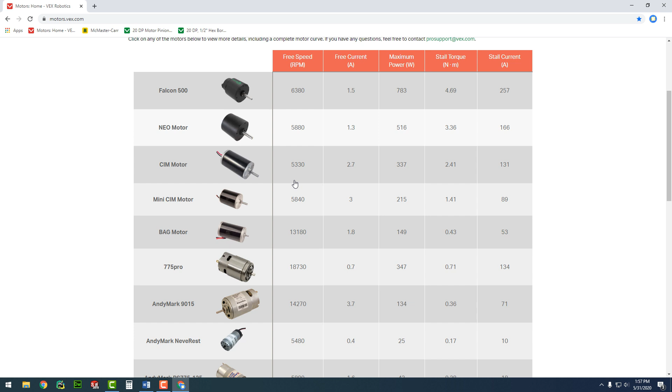The place to start would be to go to motors.vex.com. They have a really nice chart for all legal FRC motors. The motors down here are generally for mechanisms, and up here are the bigger motors, more power for drivetrains. So the Falcon's a great motor, but they're out of stock. We can't get our hands on those, so we can't really use that. We do have a lot of CIM motors in stock. They're pretty cheap, and they're ubiquitous. So let's talk about using a CIM motor for a drivetrain.

Now some of you might say, well, why don't we just stick a wheel on the end of the motor and hook it up? And I'll explain why that's not going to work. So what this is saying, the free RPM speed, means this motor spins at 5,300 RPM if there's nothing attached. So we're going to lose a little bit, maybe 10%, if you load it down with something, which we'll be doing because we'll be putting a robot on it. So let's multiply that out. And so our real RPM is going to be around 4,800. And if we divide that by 60, RPM is revolutions per minute, so that's about

80 revolutions a second. So if we were to put a 6-inch wheel, let's find the circumference by multiplying times pi. That's an 18.8-inch revolution. So every time a 6-inch wheel goes around, it moves about 18.8 inches. And if we talk about doing 80 revolutions a second, then that's 1,500 inches per second that wheel will move. And if we divide that out by 12, then that's saying that our motor and our wheel attached directly to it will move about 125 feet per second. Some of you might say, that's awesome, that's super fast, that's exactly what we want.

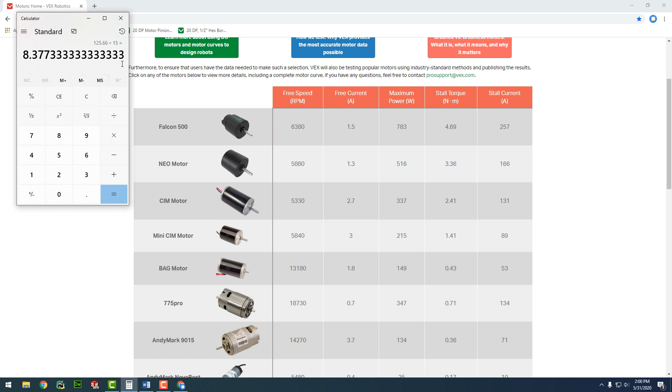And you might say, well, I have no idea what a good ratio would be or what a good speed would be. Generally for FRC, anywhere from 10 to 18 feet per second is good. So let's say we wanted to go 15 feet per second. That means our gear ratio will be right around 8.3. And you're never going to get exactly 8.3773. That's not realistic. There's no set of gears that you're going to find that'll do that. So let's figure out where we can find a gear ratio where for every one output rotation, the motor will spin 8.3 times. So you need a little gear on the motor and a big gear on your output shaft. So let's figure out where we can do that.

Okay, so let's see if we can find ourselves some gears. So if you go to VexPro again, and we go to gears, let's find a motor pinion first. So here are your motor pinions, 20-degree pressure angle. And you can see they have different pinions for different motors. We need a CIM pinion, and they have different sizes. So what size should you use? Well, the smaller the pinion you use, the smaller the output gear you use. The smaller the output gear, the lighter, and the smaller the gearbox dimensions overall. So we want to pick the smallest one we can that'll work for us. It's also a little bit cheaper, you'll notice, and when you're doing a bunch of gearboxes, that can add up.

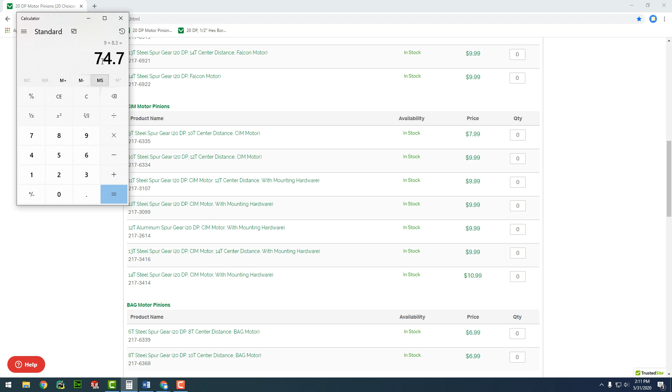So let's pick the 9-tooth spur gear, and then you say, okay, well, if we have 9 teeth and we know our gear ratio is 8.3, what should our output gear be? And so we need a 74.7-tooth output gear. So let's go back up and look at the output gears they sell.

If we scroll down, they do sell a 72 and a 74 gear. Now 72 is a much more common gear that we use in other places, so for that reason I would probably pick a 72. You'll go a little bit faster, but it's nice to use common parts, and if we have some in stock, then we can reuse them.

So we'll be looking at a 72-tooth aluminum gear and a 9-tooth motor pinion. So 72 divided by 9. So this will give us an overall gear ratio of 8, which is a nice round even number, so that works well. Okay, so we've selected our parts.

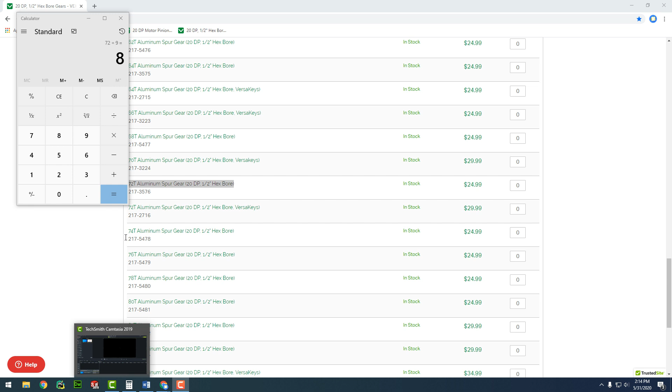Now, the great thing about VexPro is that they provide their CAD files at the bottom of the site. So if you want a 72 tooth gear, all you have to do is find it and hit download. Now these are going to download in a format called STEP, and that's something that we don't typically use in SolidWorks, but we can import it pretty easily.

So let's grab our motor pinion as well. Again, that was a 9-tooth spur gear. So if you scroll to the bottom and you find CAD files, you'll find not Falcon, not 775, not bag, there's the CIM motor. So we're looking for a 9-tooth spur gear. That one right there. Let's grab that.

So let's fire up SolidWorks and import these two gears and save them and apply materials to them. Okay, so let's open.

Okay, and we apply steel to that since it's a steel gear. And then let's open our 72-tooth spur gear here. Now the spur gear is actually 7075 aluminum. It's a different material. And then we'll save that as well. So now we have our two gears and we're ready to build our gearbox, or at least start on our gearbox.

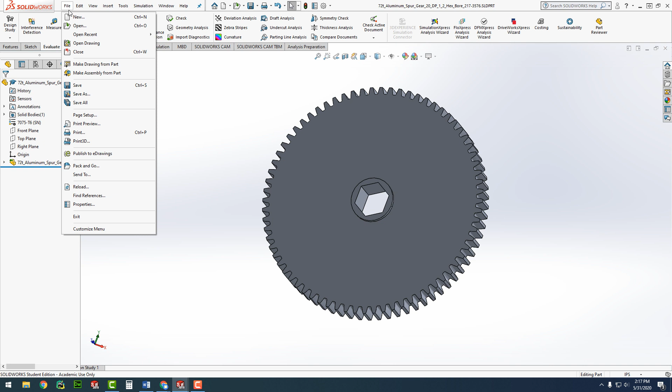Okay, so let's make a new part. And the first part we're going to make is a plate to hold our motor and our bearings. And right now you just kind of need to know the dimensions of what you want to build. So if you go back to your gear, you can see how big your gears are under the drawing.

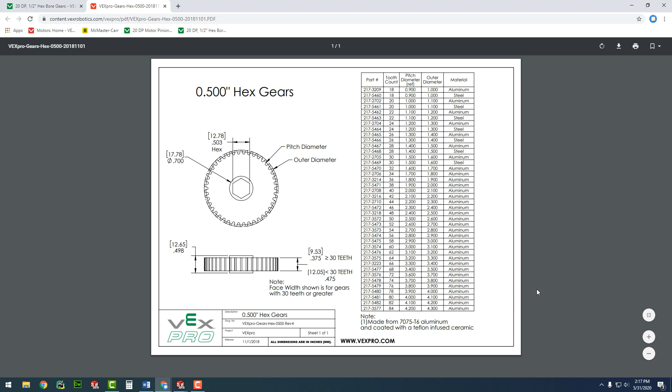So if we look at a 72 tooth gear, the outer diameter will be 3.7 inches. So this will actually have to be 4. Otherwise the gear will stick out the top and the bottom.

And then how thick should you make your plate? Well, we have 1/8 inch, 3/16, and quarter. Quarter is pretty heavy duty, but you can pocket it. You can take a lot out of that. Let's do that. Let's make it a 1/4 inch.

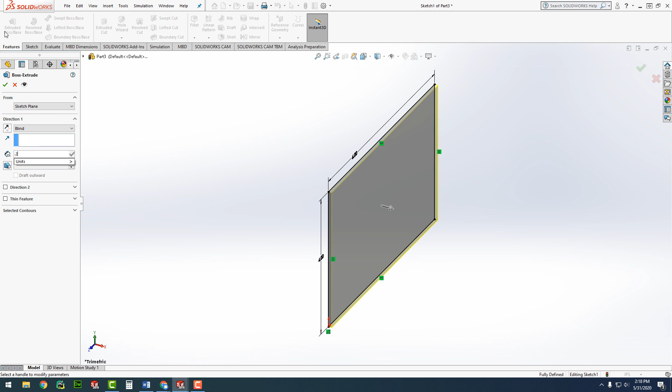And then we'll make that material aluminum as well. So let me add aluminum. May as well make it a favorite too. 6061. Okay, so there's our aluminum plate.

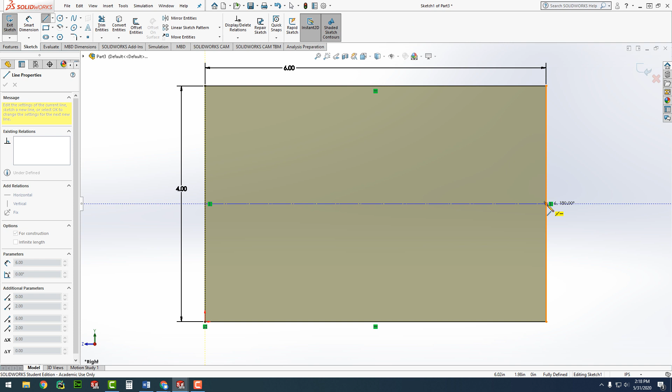Now, what we need is a hole for the motor, and then we need a hole for the output shaft as well. So what I'm going to do is I'm going to draw a center line because we'll put both holes right in the middle. Okay, so here's the hole for the motor.

And then if we go back to VexPro and we look for the CIM motor, it'll give us dimensions on how the motor mounts. So if we look at a CIM motor, down at the bottom there'll be a drawing, and we can see the mounting holes. So the mounting holes are 2 holes. They're on a 2-inch around circle, and they're a 0.159 diameter hole.

And then this hole in the middle is a 3/4 inch. So to give it some room, I'm going to make this 1 inch. That'll make the motor shaft fit through. And then what I'm going to do is draw a circle right here. See how that little line shows up? That means you're vertical with it.

And I'm going to say 0.16. And then this needs to be 1 inch away. It's a 2-inch diameter, so that should be 1 inch away. Now let's move this motor, give it a dimension from there to there, and make it 1.5 inches. Perfect.

Alright, so what we're going to do is we're going to mirror this hole there across there. There we go. And now we should be able to mount the motor to that. So let's save this as the motor mount plate. And then what we're going to do is we're going to do a new assembly, and

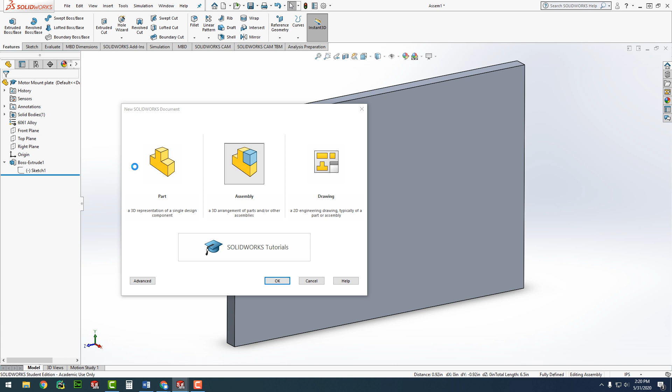we're going to take this brand new motor mount plate and we're going to put it there. So let's just do a quick test fit. So under assembly, let's insert component. Now if you go to our GrabCAD and you go to FRC common parts, you'll see we have a ton of parts that are already downloaded, and it's very likely we have a CIM motor ready to go.

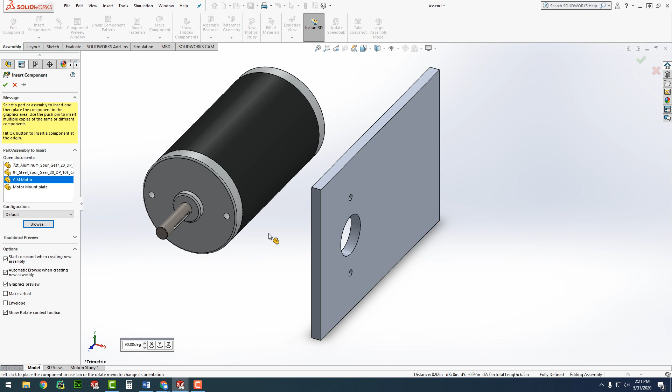There it is. So let's take this face of this motor and mount it to this face here, and then let's take this hole here, mount it to that hole there. Now that those are mated, it's around that circle, but we can still move things around that way. So we need to mate this other hole to there. And now that we've done that,

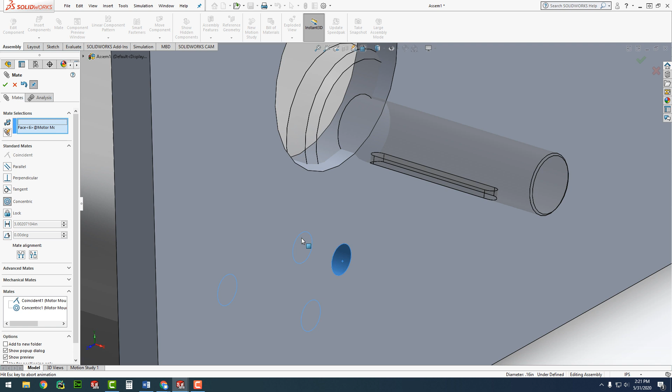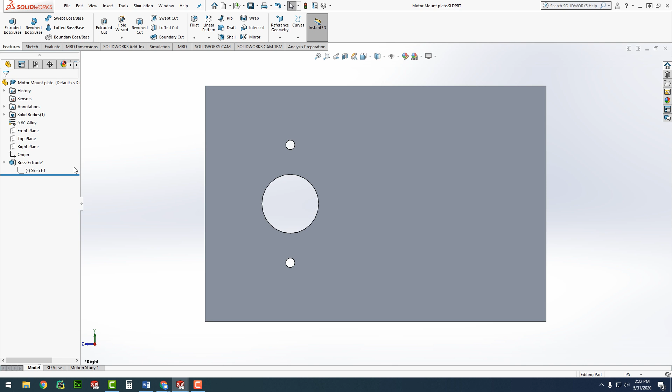we've started our gearbox. Okay, so let's save that real quick. There we go. Okay, so we've got the motor on there. Now we've just got to get our other gears. Okay, so let's open this plate back up. And we know that we need to add another hole somewhere over here for our output shaft.

You say, well, how big should that hole be? Well, whenever you have something spinning like this, you're going to want a bearing. And bearings are generally 1.125, an inch and an eighth. And we'll have to download the bearings. I think we have some in the common parts anyway. So now if we look, we have a second hole, and we can add a bearing there.

The question is, what is the distance between that? And that's going to require a little bit of computation. It's not too hard. But your center to center on your gears is calculated using your data from your provider. So if we go back to VEX and we look at our motor pinion, this pitch diameter you'll see at the bottom under the drawing.

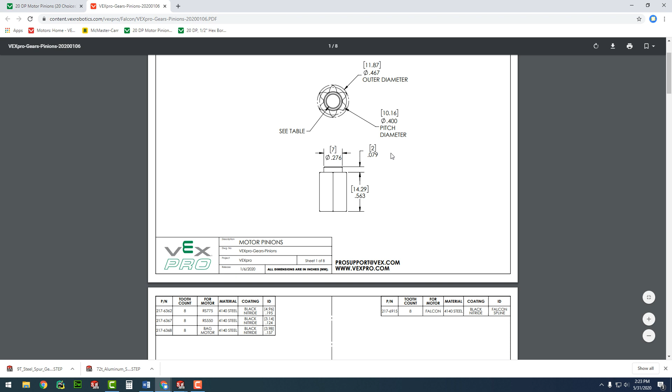So you've got your outer diameter, but when you want to mesh the gears, you want to worry about your pitch diameter. So let's find our 9-tooth CIM gear. There it is. So we have a 0.5 pitch diameter, so it's a half an inch across. And so from the center to there would be a quarter of an inch. So that's pretty easy to remember.

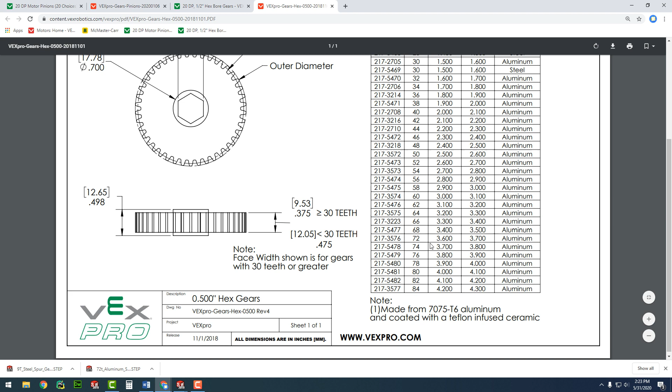Now, let's find the pitch diameter of our other gear, which is a 72 tooth. So the 72 tooth has a pitch diameter, not an outer diameter, but a pitch diameter of 3.6. So from center to the edge would be 1.8. So we need to add those two up.

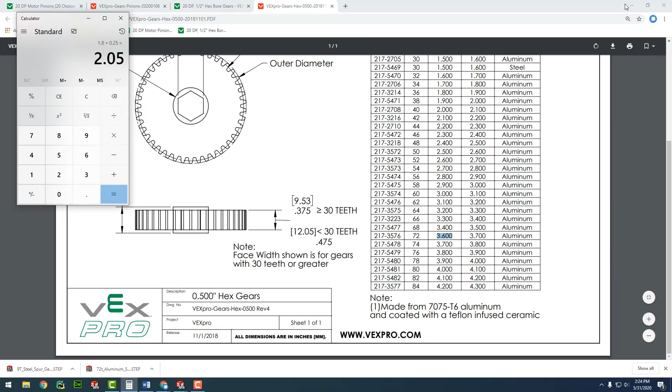So 1.8 is the center to the outside of the pitch diameter of the larger gear, and then we add a quarter of an inch to that for the spur gear. So we should have a center to center distance of 2.05. And then now the nice thing is, once you do this, if you do need to change your gear ratio, it's very easy to change your center to center distance. So 2.05. And there we go.

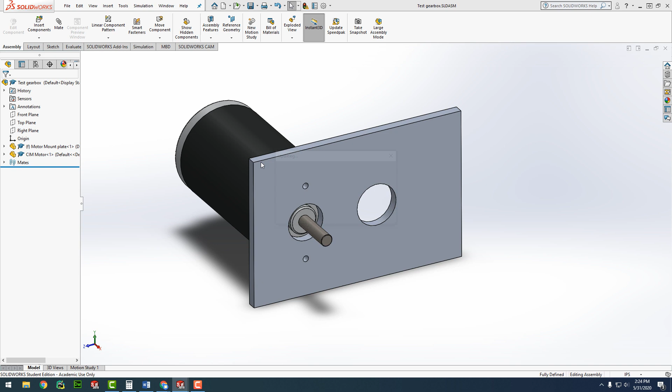So now, if we go back, we can insert a bearing, and they should be in GrabCAD, common parts, bearings, like the VEX Pro. Now we're going to use a 1/2 inch hex. I'm going to use an output shaft that's hex, because hex is the best.

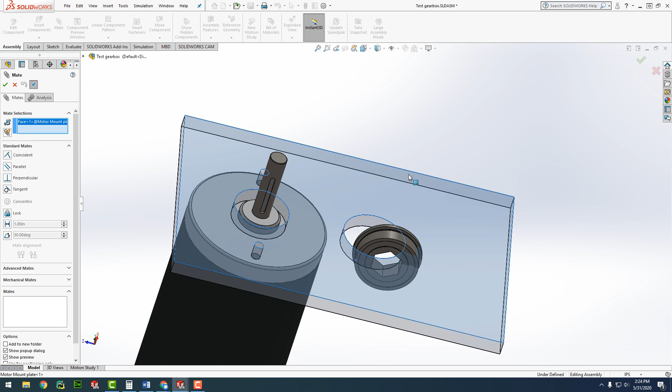Alright, so let's mate that face to that face, and then we're going to make these concentric right here, that and that. And what we have right there is the start of a gearbox. So let's insert our 9-tooth spur gear. So that's what's going to go on our motor. So we'll mate that to that.

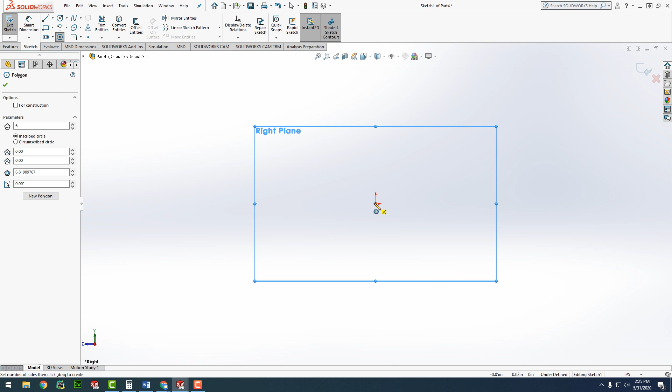And then what we have to do is we have to make ourselves an output shaft, so a 1/2 inch hex output shaft. So we're going to do a new part, right plane, there we go, made ourselves a nice hexagon, and a 1/2 inch hex is from there to there. And let's start with a 6 inch long shaft and make it out of aluminum.

The nice thing is if you use the correct materials in all of your parts, then you can actually use the SolidWorks program to tell you how much it will weigh. So let's call this the output shaft.

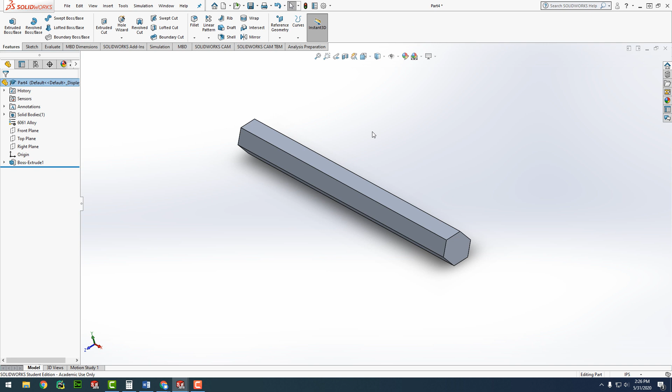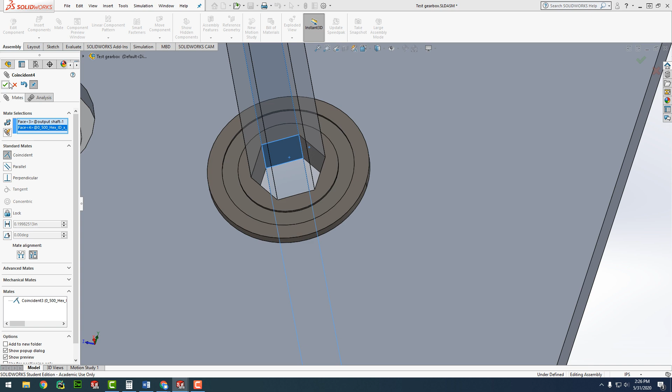So we're going to insert that new output shaft we just made right there, and we're going to mate it onto our bearing. Now, because the bearing is concentrically mated in that hole, it will still rotate. It's not exactly how the bearing would rotate in real life, but you'll get the picture. Okay, now we're going to mate that face to that face just so they're flush. And I'll show you how we'll actually hold that in position a little bit later. Alright, so now we've got that.

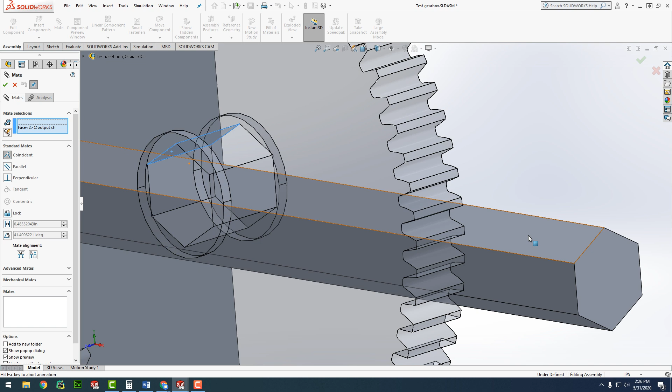So in theory, if we've done our calculations properly, when we mount these two, they should mate properly. The two gears should be in alignment. There we go. And then what I'll do is I'll just get them close, and I'll show you a neat trick you can do with the gears that's kind of fun. Okay, so these gears look like they are pretty well meshed right there.

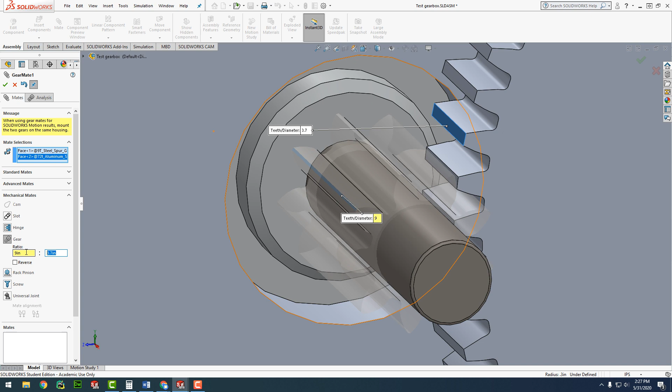So a mate you can do under mechanical is a gear mate. And so what you can do is you can say, now you got to do the circular part of the gear and the circular part of this gear. And then you need to give a ratio. Now we know we have a 9 tooth and a 72 tooth. There. So now, when we spin this, you'll see they actually mate properly. So now we've got a pretty good gearbox going.

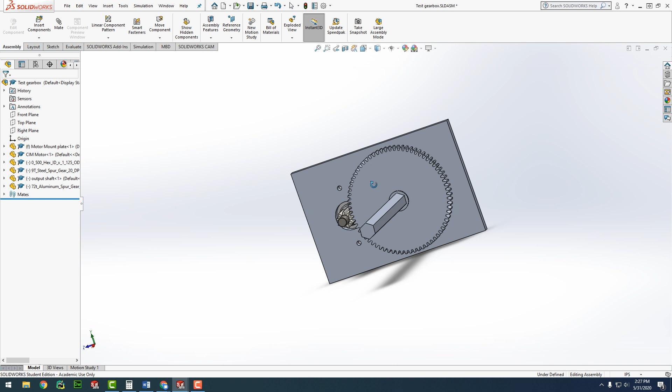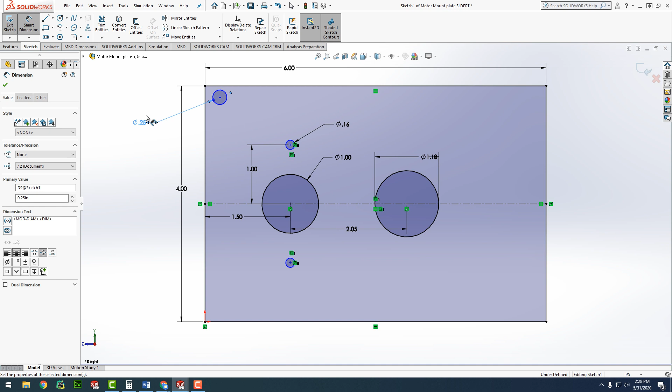The only problem with this is these shafts are cantilevered, meaning there's no support on the other side. So there's nothing preventing this stuff from falling apart. So what we'll need to do is add a way to hold this all together. So what I'll do is I'll modify my drawing, and I'm going to make some spacer holes and some mounting holes. Okay. Generally, 1/4 inch bolts are a pretty common thing we use, so we'll make it a 1/4 of an inch. And then let's space them off from the top by 1/2 and 1/2.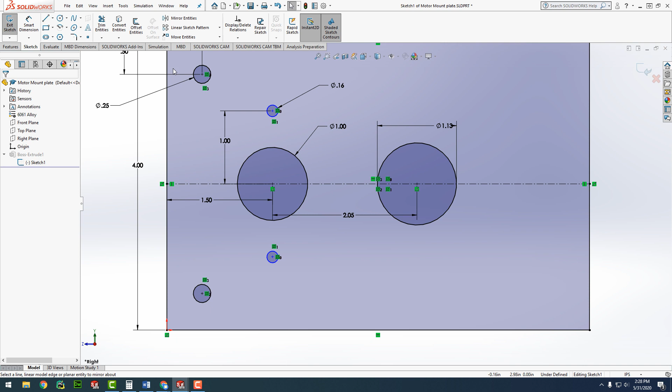This is a little bit generous. You know, if we were doing a real gearbox where we were trying to save weight and things, we'd probably cut this all down. We'd definitely pocket this out. So let's mirror this one across here. Keep the symmetry. That's always a good way to handle things. And then we're just going to draw this for reference so we can mirror our mounting holes on the other side too. Now, you don't always get the luxury of being able to mirror things, but since this is a pretty simple gearbox, now we have 4 mounting holes that are pretty reasonable. So go back here. Okay, so this is looking pretty good.

Now the issue we have is we've got to make a sandwich out of this. So we need a spacer to go from there, and then we need another plate on the other side. So let's open this plate up, and what we're going to do is we're going to say File, Save As. I'm going to say Save as a Copy and Open. And instead of the motor mount plate, this will be the outer gearbox plate. Now this is a completely different file. If you were to switch back and forth, you can't really tell, but this is up here the outer gearbox plate. And what I'll do is I will actually change something so we can see the difference.

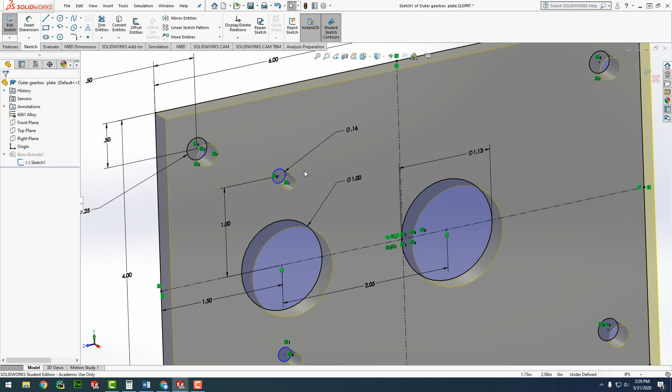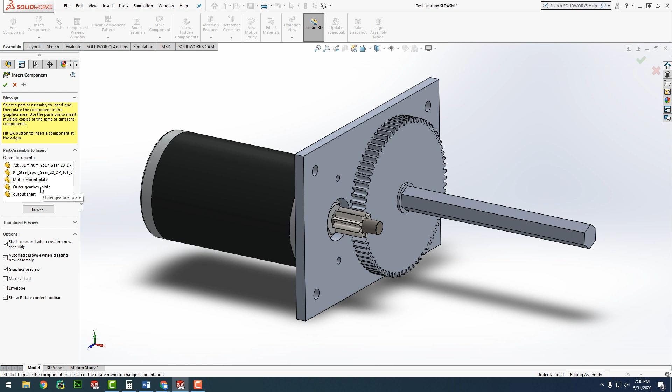So I'm going to make this big enough that you can fit your wrench in there so that when you need to adjust it, now you can see the two plates are different. So what I'll do, this will allow us to remove the bolts that hold the motor on, even though we have the output plate on. So a little design thing like that that's kind of handy.

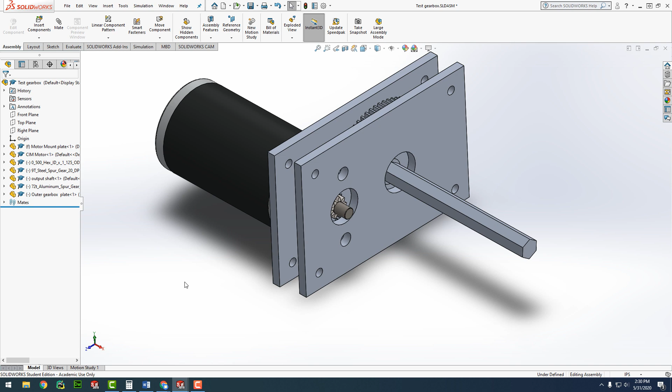Now this plate can obviously move around anywhere, so how wide should this be? Well, we don't really want that motor pinion sticking out a bunch. We need it right about there. So how would we space this off? Well, there's this great website called McMaster Carr, and McMaster Carr has everything in the world that you could want. So if we go to McMaster Carr and we type spacers, we know we need them for a 1/4 inch bolt. So spacers and a number 1/4 inch bolt. There we go. Let's go with plastic.

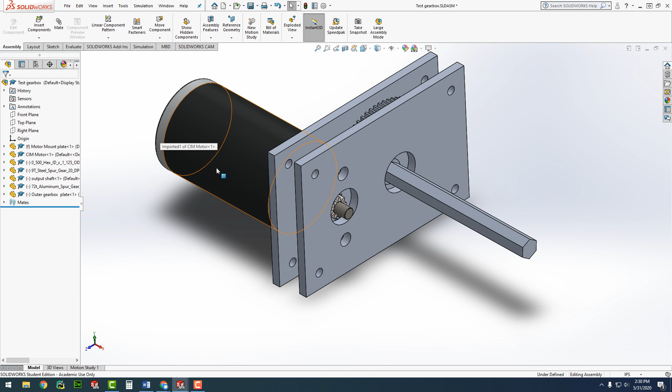Generally pretty cheaper. So now we have tons of spacers available. They're not super expensive. We just need to know the distance, the width of them. So I'm going to evaluate. We can hit the measure button and we can measure. I kind of roughed it in. So this is 0.73. So it looks like if we did a 0.75, that would work really well.

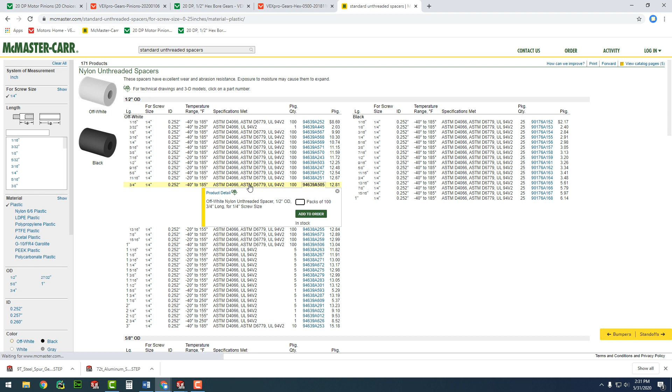So let's do that. The great thing about McMaster is if you find a part that you want, you can click on Product Details, and right there is a 3D SolidWorks save file. So we can save that, and then we can open it. And again, it's always a good idea to change the material. Now that, let's see if we can remember what that was. That an ABS? Nylon. Okay, we should have nylon as one of the plastics here.

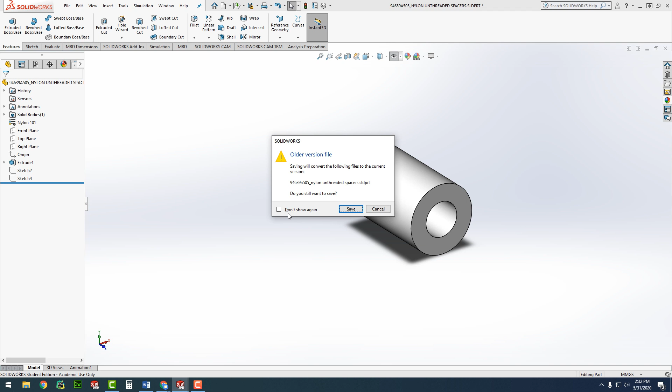Let's see, where's nylon? There it is. Okay. And then if you want, you can also give it the appearance that the thing will have. Cool. So that's the spacer we have. Now what's really nice about this is that part number right there. If you were to grab that and put it into Google and search McMaster-Carr, you would find that it would come right up. And so if you build something with McMaster parts, it's really, really easy to order them.

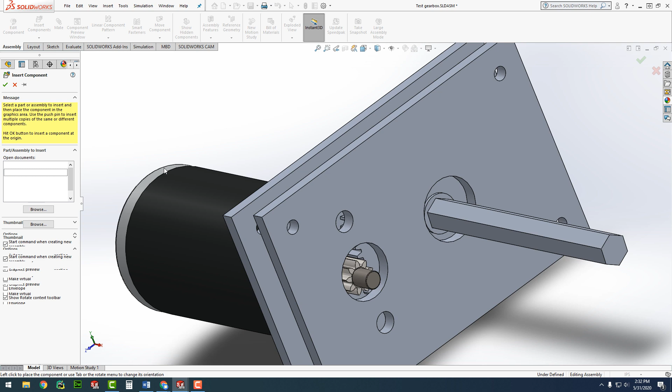The cool thing is a pack of 100 is $12. So these are pretty cheap spacers, and McMaster ships really, really quickly. So we could have this built tomorrow if we wanted, if we had the gears. So let's grab the threaded part here, and let's mate that face to that face. That's great. We got this. Got to move around. So let's make these concentric. So make that line up with that.

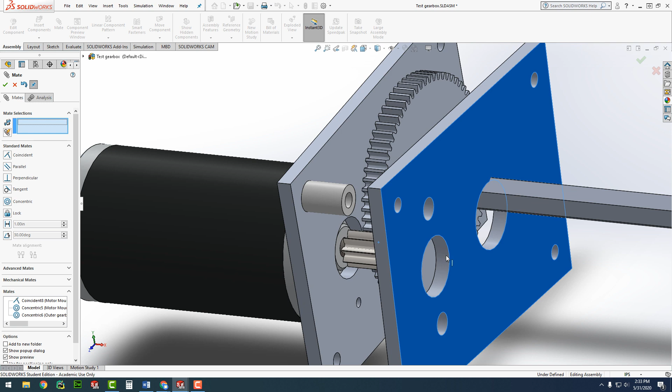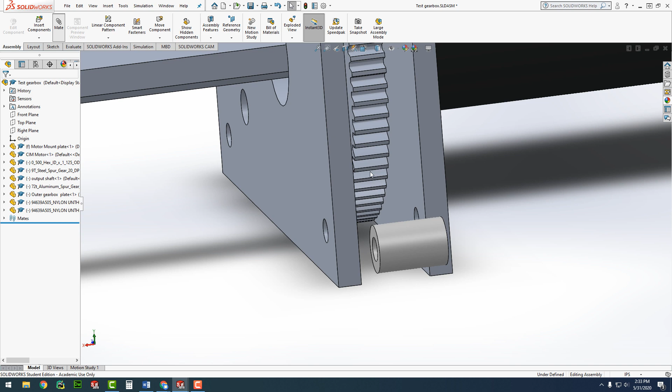Now this still moves around freely, so let's make that concentric with that. Now it still can move in and out, so we have to mate that to that face. Now our sandwich is mostly complete. This thing can spin up and down, but it can't move in and out. So let's grab another spacer. Stick it right there, and we'll do the same thing. Mate that face to that face, concentric, concentric, and then I like to move it the other way just so you can actually see it mate properly and click into position.

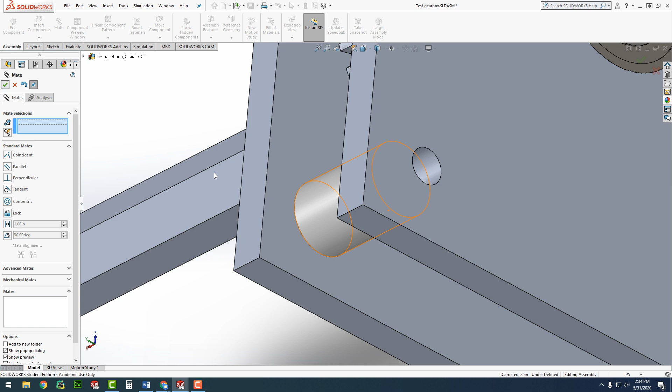There we go. So now we have a gearbox, and of course, it'd be a good idea to add spacers in all four corners. So let's do that real quick. There we go. Alright, so we have a gearbox. Now again, the problem with this is this shaft is unsupported. So what we'll do is let's just grab another bearing. That bearing there. And let's spin it around and put it in this side.

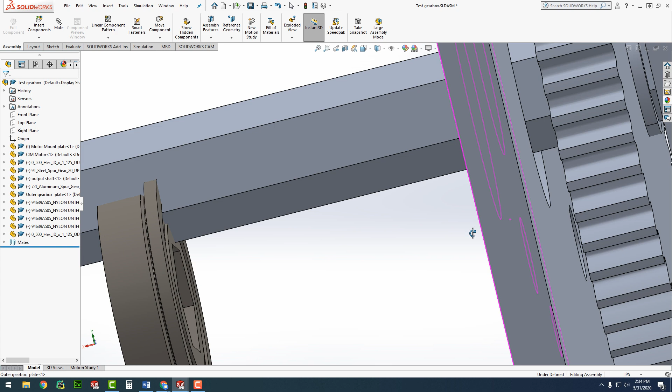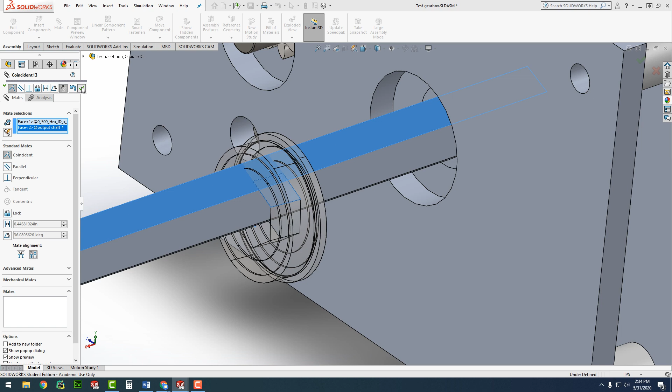Now you see that flange there? That thing means it can't come out the other side. That's why they have that flange, so it'll stick in there. So if you bolt this all together and the flanges are both on the inside, then the bearings cannot fall out. If the flange was on the other side, you could see it could kind of slide right off the shaft that way, and that's not really what you want. Okay, so let's just line this up and mate that together. There we go. And then we want this lip, this flange, on the inside of that, like that. Okay.

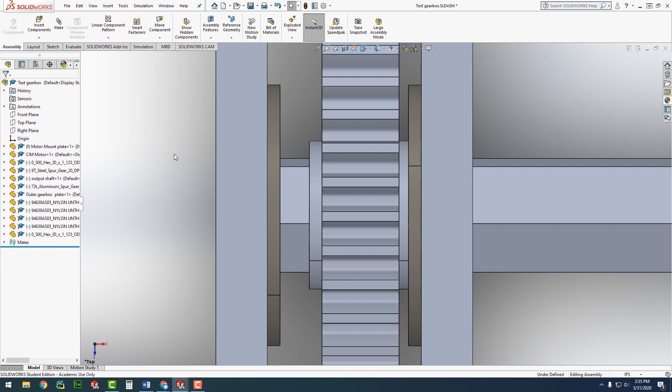Now you can see we do have a little bit of space here where this is not moving. So what we're going to do is mate that face to that. And what would be required here would be a spacer to go from there to there. Let's just get a quick idea of how it's looking. Looks pretty good so far. And again, you can see those bolts.

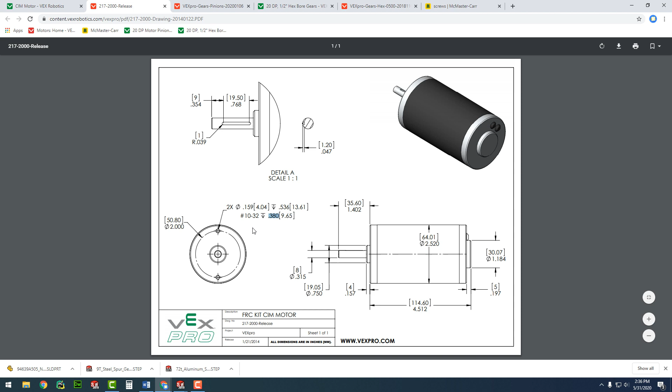Now, the other good thing about McMaster is if you want to find a bolt, it's really easy to do. It so happens that those are 10-32. So if you were to look at your CIM motor, and you go to the drawing, it should say, I know this from experience, it should say that it mounts with a 10-32. Yep, so you know it's a 10-32 and 3/8 of an inch deep. So we can go back to McMaster and we can find ourselves a nice 10-32.

And you know the plate's a quarter and it can only go 3/8 deeper, so let's call it a 1/2 inch. And we'll grab a socket head and let's make it 1/2 inch deep. Alloy steel is fine. Cheap, 100 for 10 bucks. So let's get that. Again, go into the product detail, scroll down, and there's your SolidWorks file.

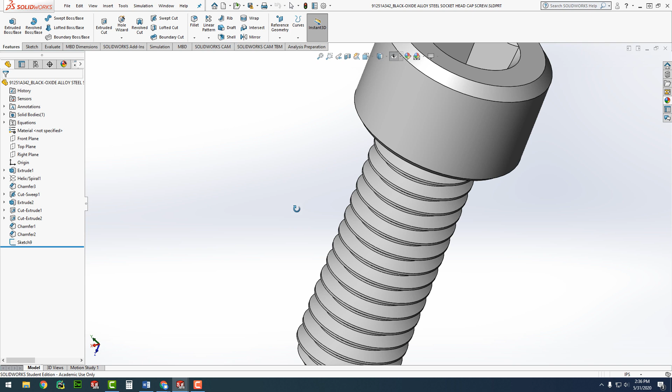So let's open that McMaster thing we just downloaded. It's an easy way to get fasteners. You can create your own, but man, this is way, way easier. So sometimes McMaster leaves the sketches on, which if you see it in your drawing looks a little funky, so I like to just kind of hide those. And again, always a good idea. So that's material. Don't really have a steel alloy in there yet, so let's just do that for the moment.

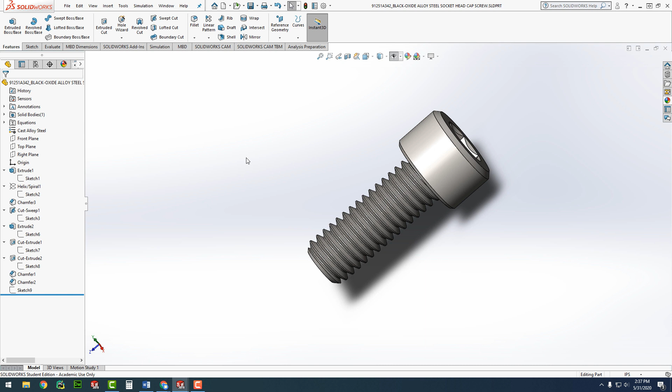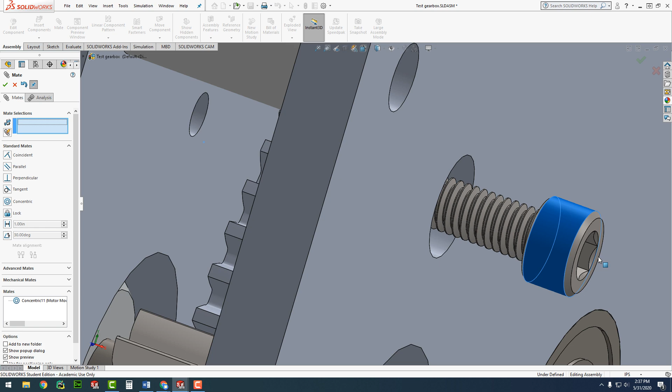Okay, so let's insert that bolt. I like to give it a quick rotate just there. Now we know we want to make it concentric, so since the cap screw, it's nice and easy. It's got an easy head to do that with. Make it concentric with that top hole, and then pull it out. And we want to mate that face to that face. And there we go. So now we've got one screw in.

Simple copy, paste. When you copy paste, don't just grab the item, grab it in the tree, and then hit Control C, Control V. Works a lot better. Alright, and then we're going to mate these to be concentric. Pull that out of there. There. Okay, so our motor is mounted. We know what screws we need to buy. We know what spacers we need to buy. We know what gears we need to buy.

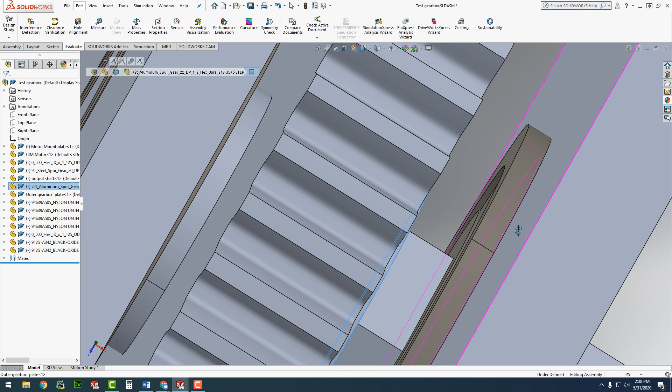There's only one thing left we've got to do, and that is measure between this face and this face. So let's do that quickly. And so what we'll have to do is probably make a custom spacer out of Delrin. That will work. So that's 0.13. Well, that's only 5 thousandths off from an 1/8 inch spacer, which are available as a product. So I'd be willing to bet if you go to our GrabCAD and the common parts and go to spacers, you will find a 1/2 inch round spacer that is 1/8 of an inch thick. And there it is.

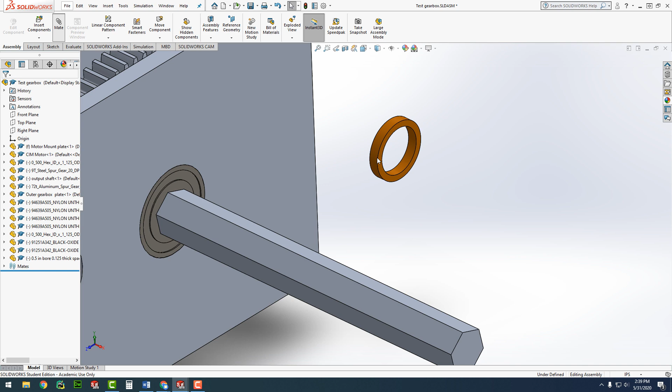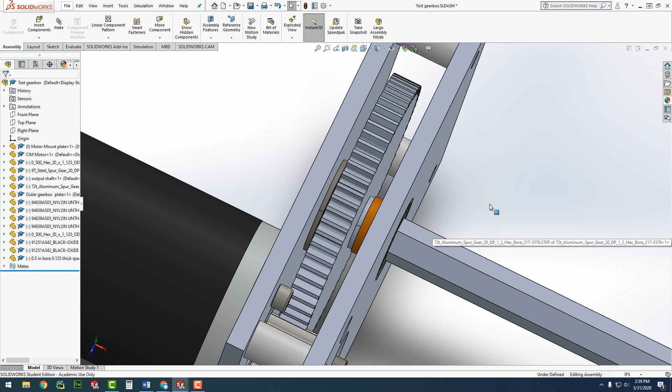So let's make this concentric with our bearing. And then you could either mate it to the gear or the bearing. I'm going to mate it to the gear. And that'll just give a little bit of difference between there and there. Okay. So if we look real closely, there should be a very, very small difference there. Perfect. That is a very, very nice snug fit spacer that just happened to work perfectly. Alright, so now we have our plain gearbox. We have holes to mount it to.

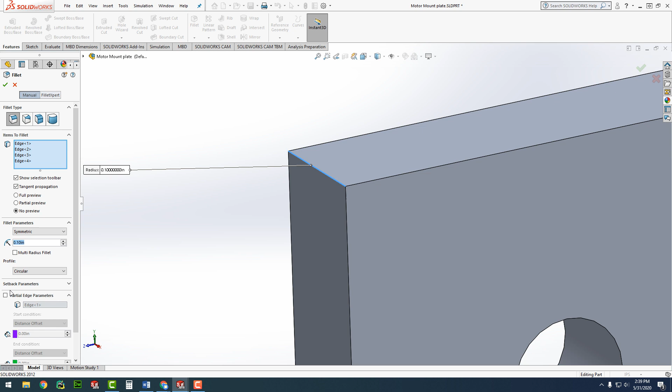Now the one thing I would say, Forrest would agree with me, is what you always want to do is hit fillet, and then that, and that, and then let's call it 1/10 of an inch. And let's preview that. What that does is it rounds the corners a little bit, and when you're either machining it or you're going to water jet it or laser cut it, first off it's less sharp, which is always a good thing, especially if you're doing it out of aluminum. The other thing that's really nice is it's stronger, so especially in corners, internal corners, you're going to want to do that.

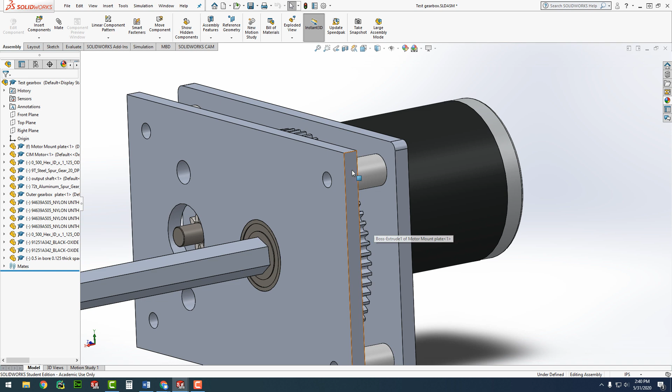So you can do the same thing with this one. You're going to want to fillet the corners, and do it on internal and external if you can. Gives a little bit more of a finished look. Okay. Alright, so there's our gearbox.

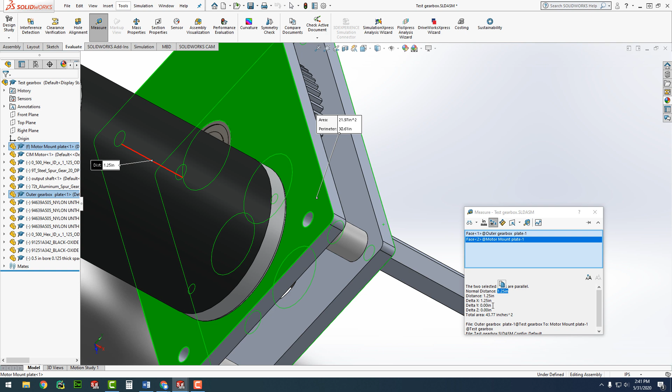Now again, if we want to go over to McMaster-Carr, you can find yourself a nice 1/4 inch bolt. And you might say, well, I don't know how long the bolt should be. Well, again, bust out your evaluate tool, hit measure from that face to that face, and that's 1.25 inches. So it's got to be longer than 1.25 inches. So let's just call it 1.5 inches.

There we go. Alloy steel is always a good choice. Now they have fully threaded or partially threaded. I'm partial to partially threaded. And hit save. Let's open that up.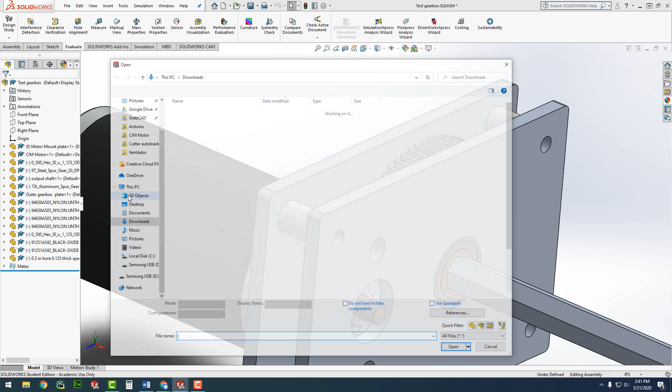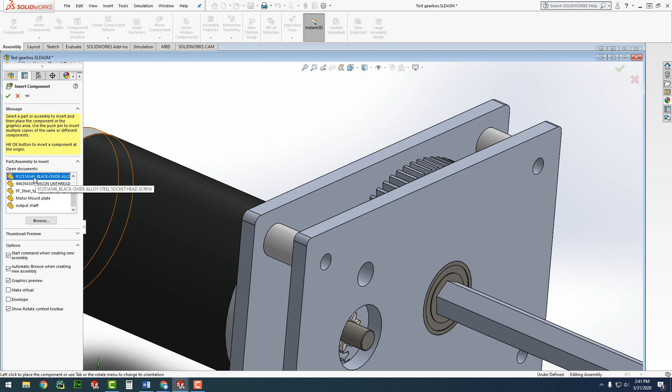And there's the bolt that will hold the whole gearbox together. All the sketches hidden. They are good. So now we can simply insert these as well. I'm not going to do all of them because you've watched me do one, so that kind of gives you the feel of it here. So mate that face to that. Now, if it mates the wrong direction, which sometimes it does, you can flip them here. I got it right that time, but if you run into that, that's a quick, easy fix for it.

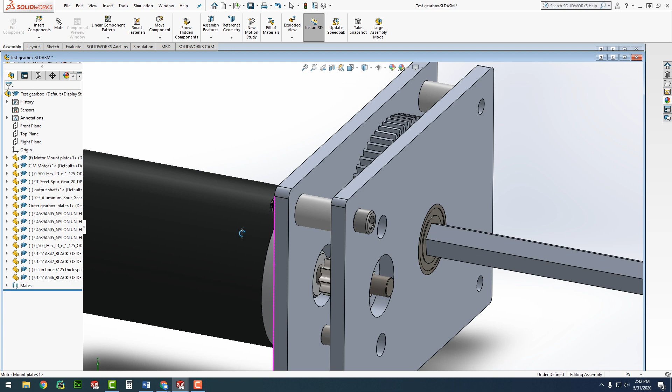And there you go. And then, of course, you could go to McMaster. You could find the right nuts to put on the other end. But likely you'll be bolting this to a frame member, so that bolt would have to be a lot longer. So you might be putting an 80-20 or box tube, so that would be quite a bit longer.

Okay, so now you have designed a gearbox to go a certain speed. Oh, that's the one thing we should do, is let's mate that. Now typically there'll be a thrust bearing in there, a little bronze bushing or something that will prevent it from rubbing the back. So I don't have that in there, but that certainly wouldn't be an issue if you had to add it. And now you'll see if you spin your motor shaft, your output. And this again is a 1:8 gear ratio.

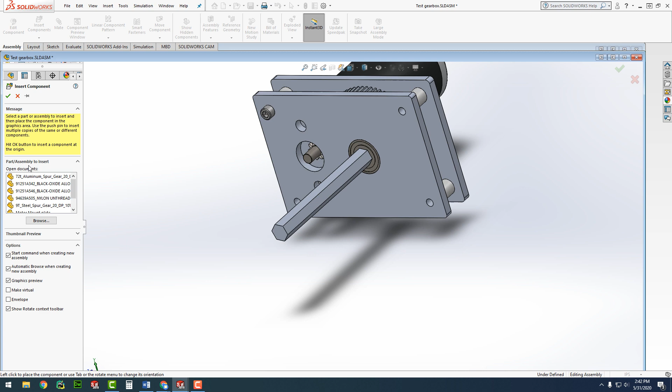So if you were to take a wheel, which we also should have lots of in our common parts folder, let's do a Colson wheel. That'll work. That's a good one. That's a good wheel right there. Alright, so we can mate it right to the output shaft.

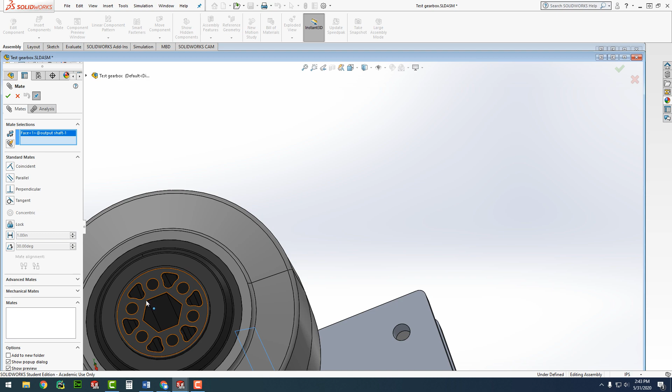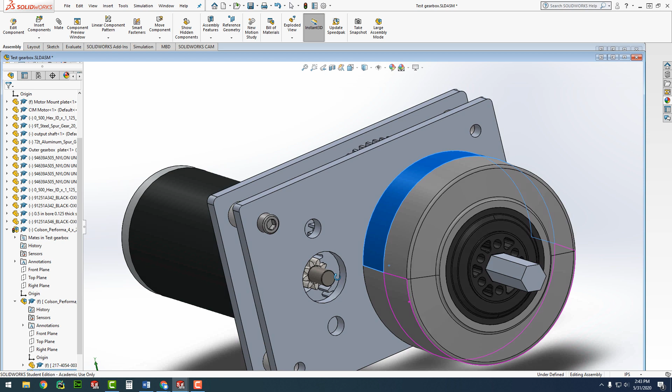Now generally I mate most of the time faces to faces. It does allow things to move. If you mate a line to a line, it's much more restrictive, and then you can get the very angry over-defined. Okay, so there you go. You have a gearbox. Now you can see we have some issues because that wheel won't touch the ground. So things would have to happen, like we could move these holes down. It doesn't necessarily have to be in line.

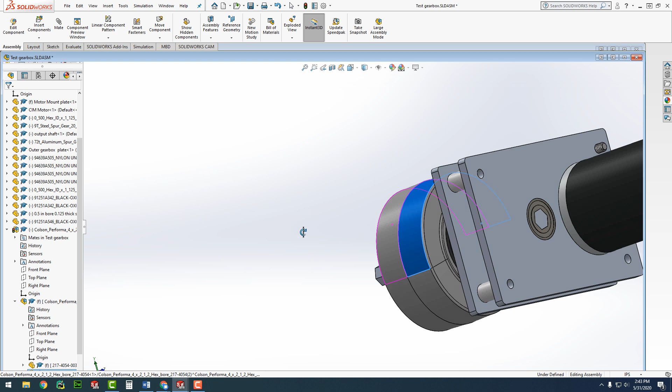We could also trim the gearbox shape a little bit to make that work, or we could use a larger wheel. But pretty simple tutorial on how to design a gearbox, figure out what size you need of parts, figure out where to get the parts from, figure out fasteners, and how to get it all together. The great thing about this is if you do all your fasteners like this, you can go to make drawing from an assembly,

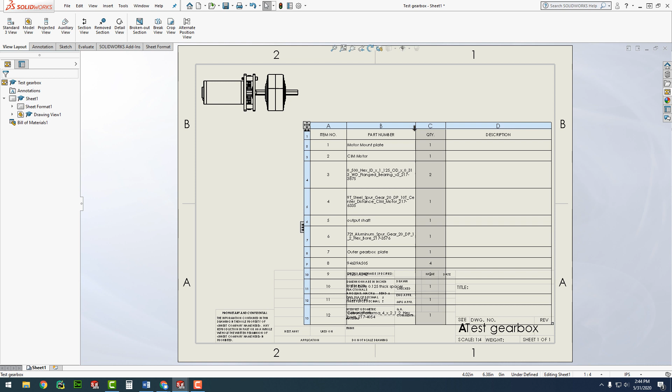and you can take your drawing, your assembly, and you can put it on there, and you could say insert, tables, bill of materials. And if you insert your bill of materials right there, and then you usually got to format a little because it doesn't do a very good job of that, but if you put a bill of materials in, it will list all of the parts that you have on your robot.

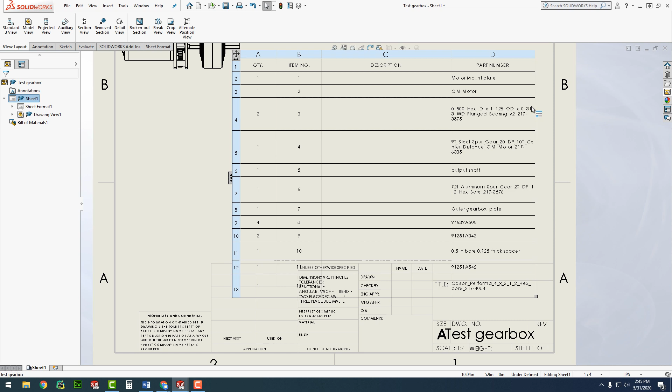And the great thing is you can generate a list of all the parts you need to go buy. So we can go to McMaster and we can order all these parts up in one shot. We know how much it costs, we know what we need to buy, and it comes overnight. So by knowing all these parts and the quantity of them, basically we can print out an order and have it the next day or next couple days and make this gearbox very, very quickly.

The other great thing is, as long as your parts are smaller than 12 by 12, they can fit in the water jet, or 12 by 24, they can fit in the laser cutter. So we could make this out of wood, we could put it all together, we could try it and see if we like it, and then make it out of the real material later, the more expensive materials.

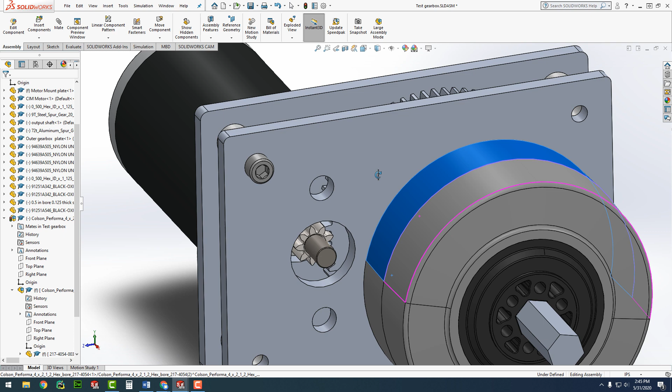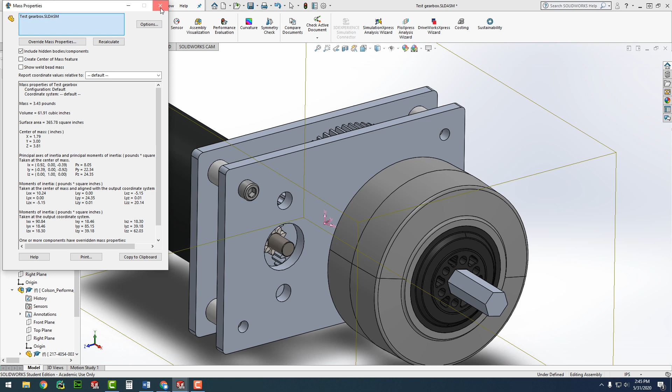So the last thing I want to hit is if you go to evaluate now, and you go to mass properties, you can see that this gearbox weighs 3.43 pounds. So if we have 4 of these on the robot, we know out of the 120 pound limit, we've used 13 pounds, so a little over 10% of our weight. So just something to keep in mind. It helps us keep track of weight.

Now this is a single stage gearbox, one small to one big. You can do multi-stage gearboxes, you can do all sorts of fancy stuff.